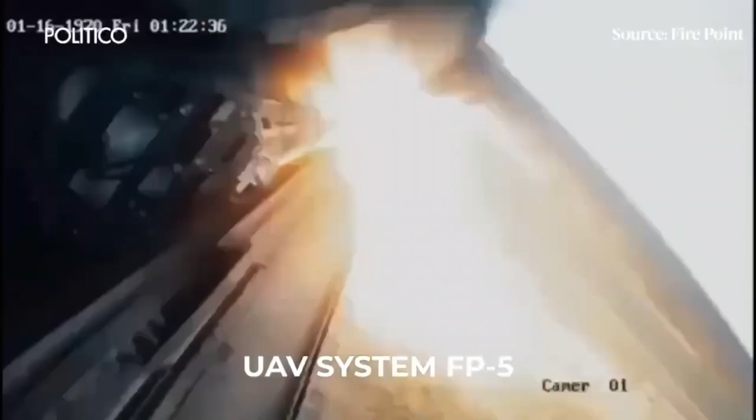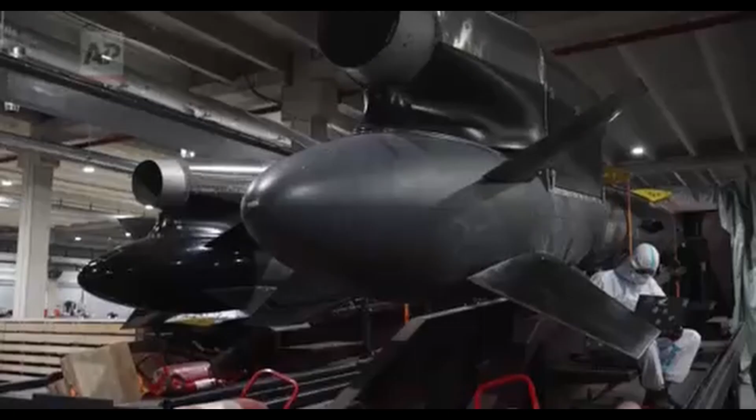Recently, Ukraine has demonstrated a new cruise missile named FP-5 Flamingo, which from the first glance can play a game-changer role in the conflict. In this video, we will review the Flamingo cruise missile from an engineering point of view to unveil the hidden details in the system and determine how realistic are the characteristics given by the Ukrainian side.

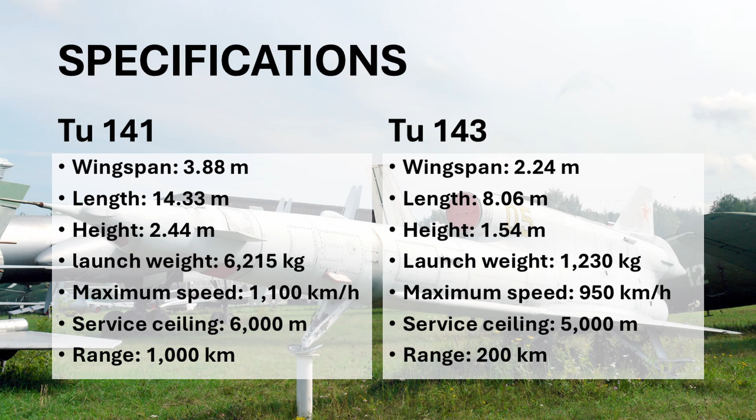After the first picture of the missile was shown to the public, the Russian side was claiming that Flamingo is a modernization of old Soviet UAVs by Tupolev, the Tu-141 and Tu-143. However, it is a complete mistake, while those UAVs have significantly different flight characteristics, much worse compared to the Ukrainian missile. In addition, the most important difference is the aerodynamic configuration. Both Tupolev creatures have delta wing configuration with frontal canards, while Flamingo has classical aerodynamic configuration with main wing and the X-shaped tail assembly with fully movable fins.

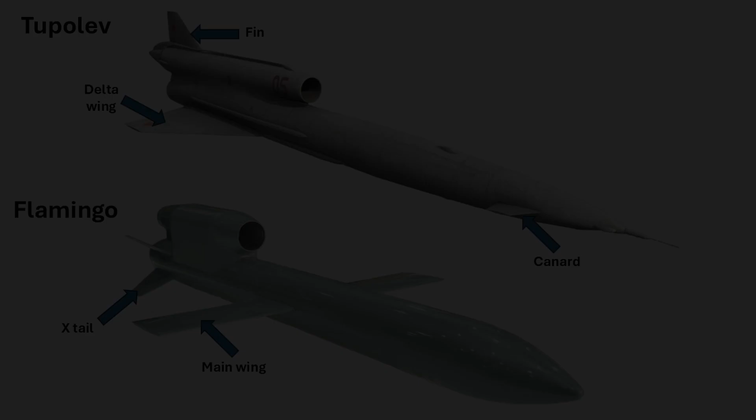The specifications of Flamingo cruise missile are quite impressive: weight 6,000 kilograms, warhead 1,150 kilograms, range 3,000 kilometers, cruise speed 900 kilometers per hour, service ceiling 5,000 meters, and the guidance is combined GPS plus INS.

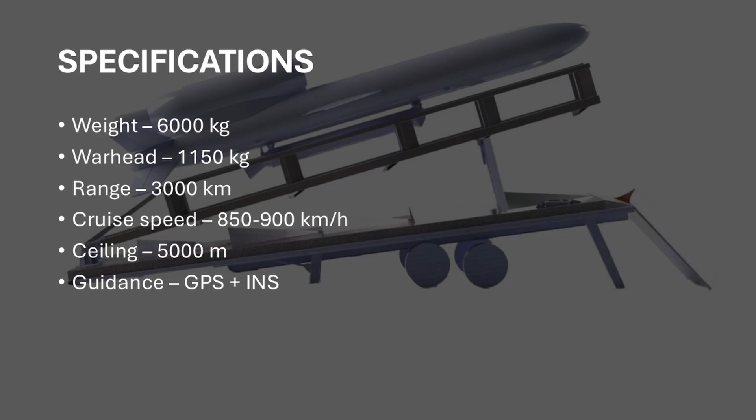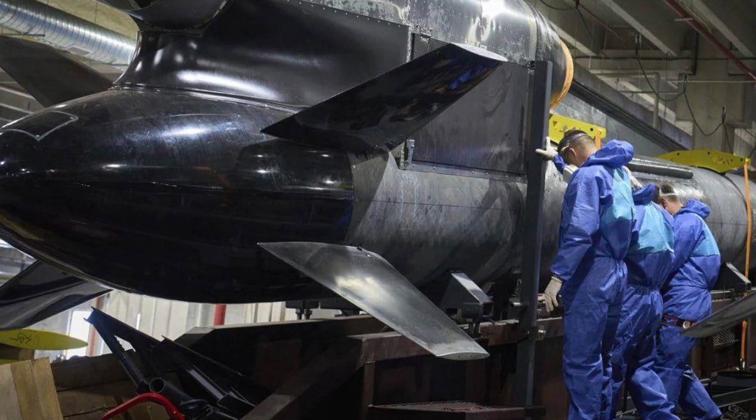On the other hand, behind these awesome characteristics, there are some trivial engineering solutions, some of them even not impressive at all, and more tend to cheap decisions to ensure fast manufacturing capabilities. First, it should be said that such an aerial vehicle is not a missile by nature. It's more of a drone equipped with a jet engine.

The first surprise of Flamingo was during its presentation video, where an Ardupilot interface was visible. Maybe it was used only for the prototype, but anyways, it shows the general philosophy during the design stage to use a maximum amount of cheap off-the-shelf solutions. On the internet, there were several pictures of the nose section, where it is clearly visible that

as a warhead, an actual bomb is placed. Based on warhead mass provided by the manufacturer, it can be assumed that most likely a partially disassembled Soviet FAB-1000 bomb is mounted directly in the nose section of the cruise missile.

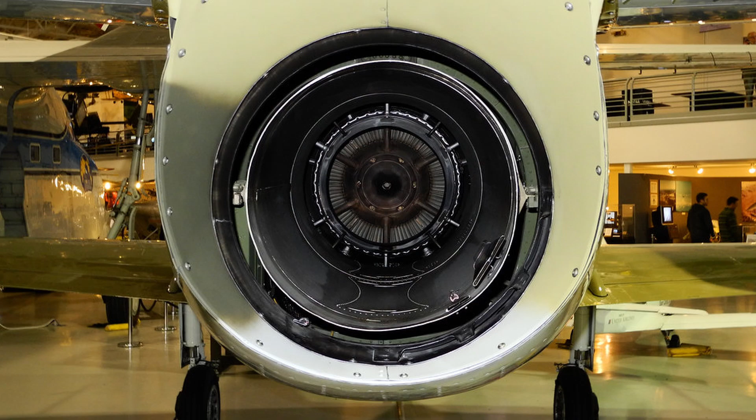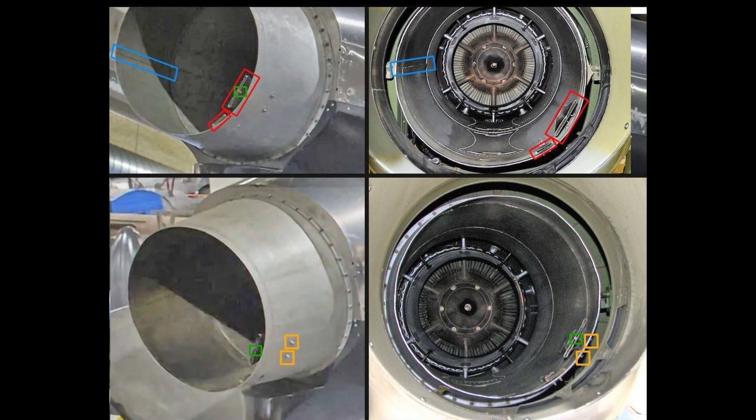Another point of interest in Flamingo is the engine. If we look closely at the pictures, some details can be seen which are similar to the AI-25TL engine used on the L-39 Albatros, the iconic training aircraft manufactured by Aero Vodochody from 1971 to 1996. If you look closely at the nozzle, flame stabilizers can be seen, which are typical for AI-25TL engines.

Another point is that these engines are still under production by the Ukrainian company Motor Sich. Based on these facts, we can conclude that Flamingo is equipped with the AI-25TL engine, therefore it has a thrust of 1,720 kg force.

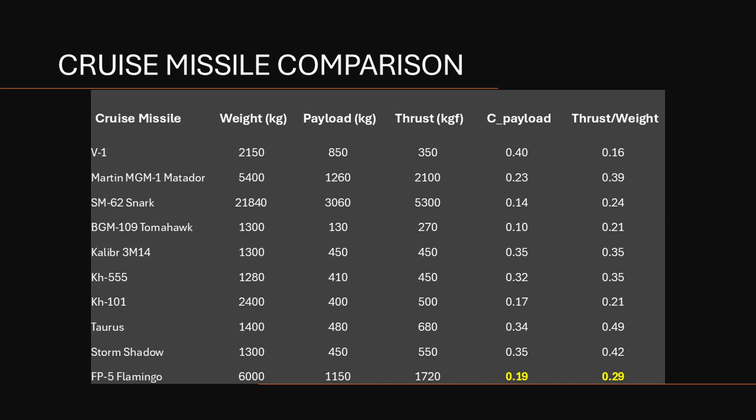As you see, the coefficient of payload of Flamingo is approximately 0.19, which tells that the payload of this cruise missile is around 19% of the total mass. Also, thrust-to-weight ratio is 0.29, which is more than enough for effective cruise flight.

To go further with calculations, the inverse Breguet equation can be used to define some aerodynamic properties of Flamingo. As we know, maximum range is 3,000 kilometers and cruise speed is 900 kilometers per hour. So the flight time should be range divided by speed, which is approximately 3.3 hours.

Initial mass 6,000 kilograms. Fuel flow for cruise flight is 468.1 kilogram per hour, so actual fuel burned equals 1,560.33 kilograms. Therefore, final weight can be derived, which will be 4,439.67 kilograms.

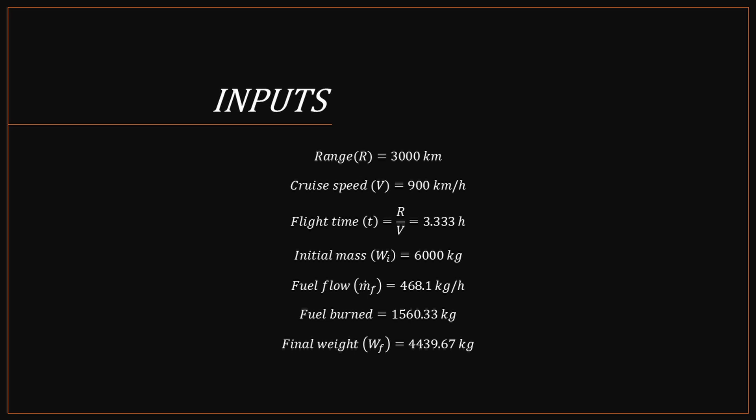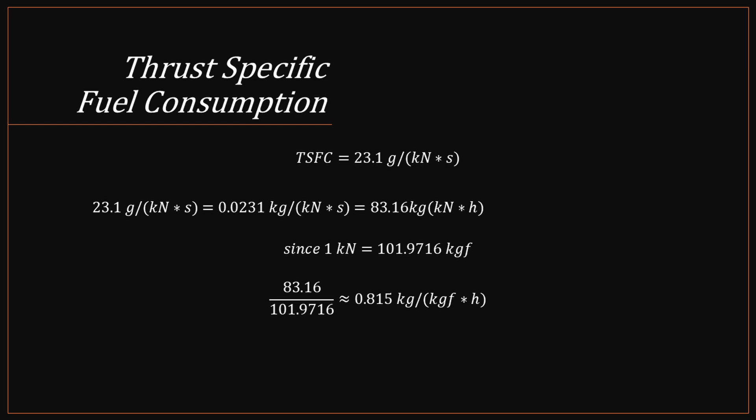Thrust-specific fuel consumption for the given engine is 23.1 gram per kilonewton-second, which if we convert to kilogram per kilogram-force hour will be 0.815. In the Breguet equation, range equals velocity divided by specific fuel consumption, multiplied by gliding ratio, multiplied by natural logarithm of the ratio between initial and final weights. This formula can be rearranged to calculate lift over drag, so-called gliding ratio, which will equal 9.02. Gliding ratio is a crucial parameter for an aerial vehicle, as it defines main aerodynamic characteristics and clearly defines how well the aerial vehicle can fly.

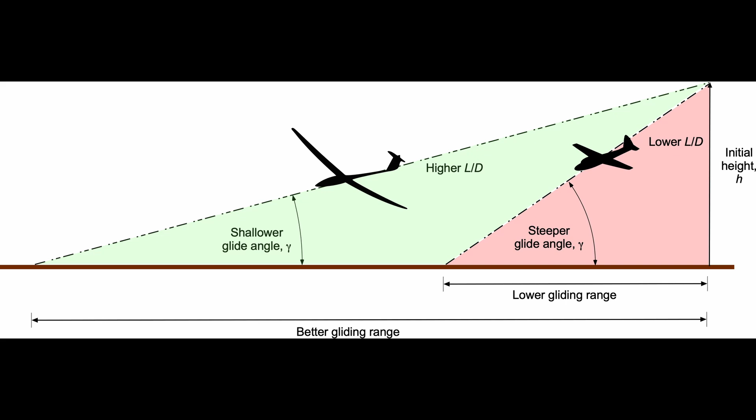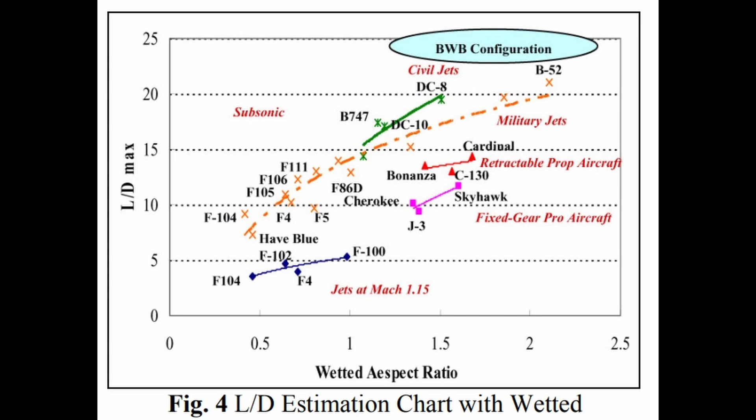In simple terms, with no engine thrust, an aerial vehicle with gliding ratio 9 can fly 9 kilometers forward while descending 1 kilometer. From a professional perspective, the value we got is lower than average. Such a lift-to-drag ratio is typical for general aviation aircraft, but not for an advanced cruise missile. This makes me think that the motivation of engineers was to make a cheap, relatively effective product with lower demands, which is visible even in the poor assembly quality of Flamingo.

Another interesting point is the wing of Flamingo, which is a straight, low aspect ratio wing with no twist and no taper ratio. In some pictures, the shape of an airfoil is visible at the root chord, and such a shape is not typical for a near-transonic wing. Having a straight wing and not using a supercritical airfoil reveals the idea that at near-transonic speeds, shock waves can appear at various sections of the geometry, which will bring additional wave drag. However, this is just an assumption, and nothing can be said without actual computational fluid dynamic analysis.

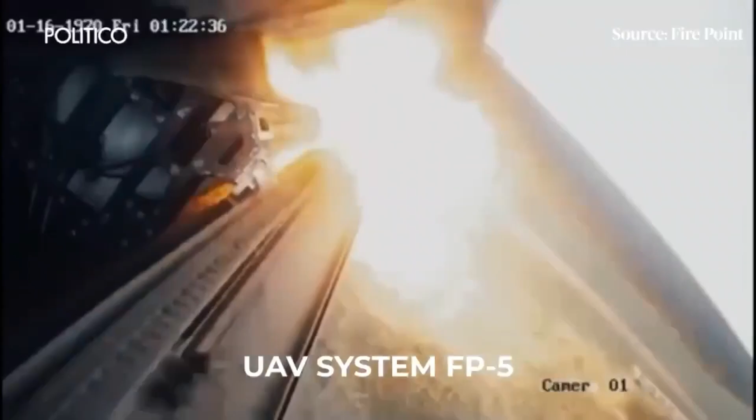In general, the FP-5 Flamingo seems to be a dream aerial target for anti-air systems. On the other hand, we are not sure that the Russian side will manage to shoot down every Flamingo flying to its target. And if it reaches the target, it will be a real death punch.